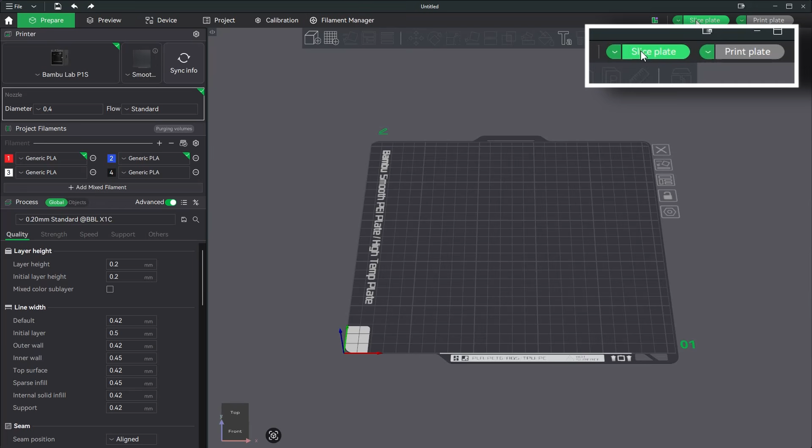Up in the right-hand corner, you have two green buttons: Slice Plate and Print Plate. Slice Plate processes your model into layers. Print Plate slices and immediately sends your job to your printer. We'll be using both of these.

The entire left panel is your control center. Scroll down and you'll see everything stacked top to bottom: Printer at the top, Nozzle settings, Project Filaments, and then Process, which is your quality and print settings. This is where almost all the setup happens.

The large area to the right is your viewport, your virtual build plate. Left click to drag and orbit, right click to drag and pan, scroll wheel to zoom. Just above the viewport, there's a toolbar with model manipulation icons. We'll be using those once I bring in a model.

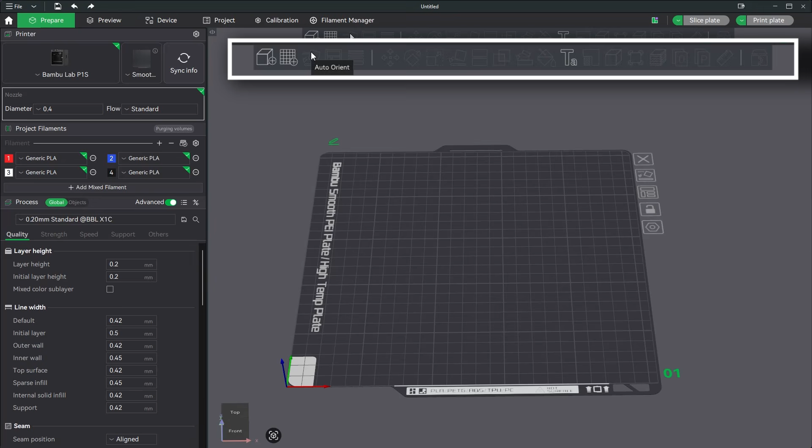Okay, it's time to bring in a model. Easiest way is to drag and drop an STL, OBJ, STEP, or 3MF file straight onto the build plate. I'm using a model I created in the last video - the one and only Gengar. You can also go to File > Import if you prefer. Bambu Studio drops the model centered on the build plate.

Depending on your file, it might come in the wrong scale or sideways. Okay, let's fix that. Since Gengar came in at a small scale, first thing I want to do is click on Scale. I want to leave Uniform Scale checked so that everything scales equally, and then I'm going to set it to 75 millimeters. Rule of thumb, if you're in America, 25 millimeters is usually about an inch, so 75 is 3 inches.

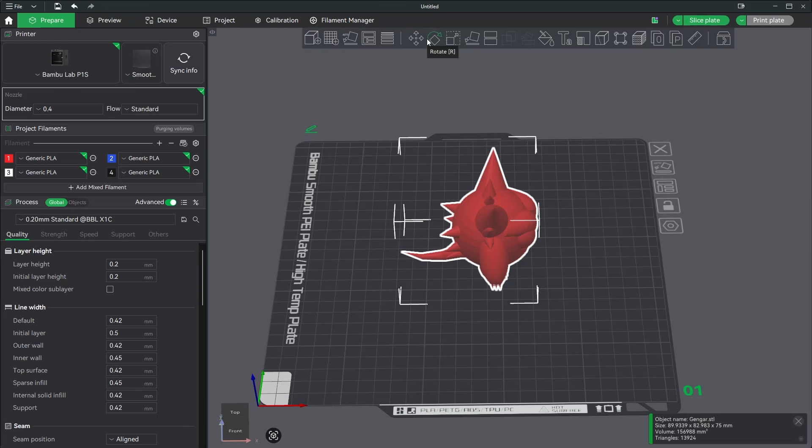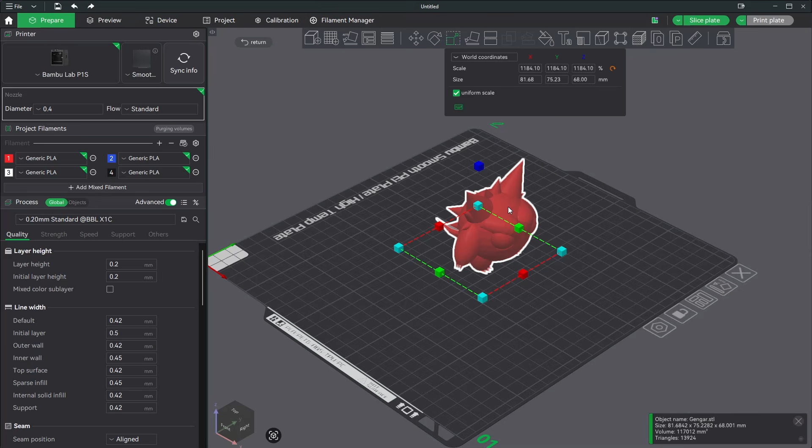Once it's in, click on the model to select it. You'll see this cube-like object around the model, and up in the toolbar, the Move, Scale, Rotate tools light up. Once you click on a tool, you'll get a tool-specific gizmo depending on which one you select. With Rotate, you can rotate. With Move, you can move. And with Scale, you can scale. You can also move just by clicking and dragging the model around.

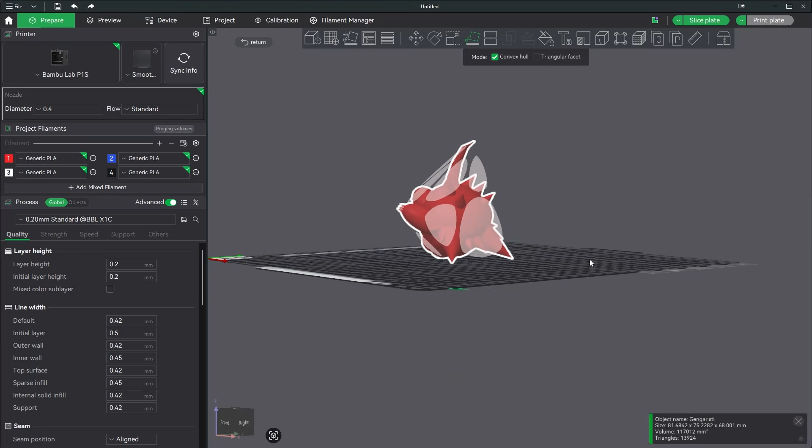There are two tools I use a lot. One is Lay on Face - this gives you options on which face of the model you want to lay on the build plate. If I click here, it'll lay it this way. Granted, this might not be the best way to print, but it's an option. Click it again. The other one is Auto Orient - it'll give you the best orientation to minimize supports and maximize bed contact.

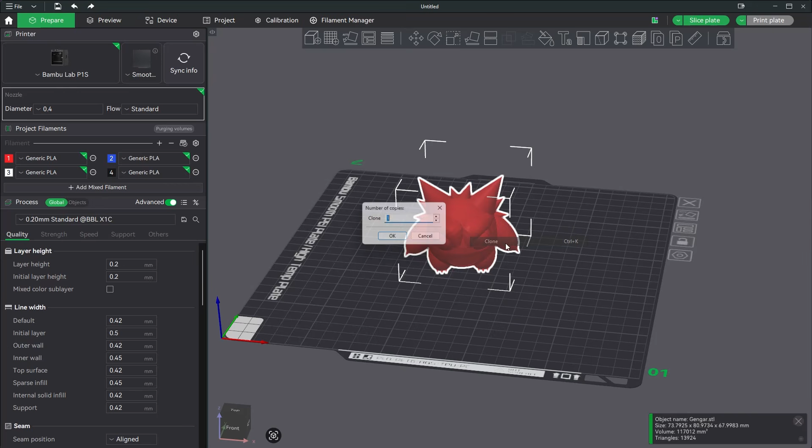Now if you right-click on the model, you get all these options. One is Clone, where you can make copies. The other is Center, where it centers the model. If you play around with these, you'll find whatever you're looking for. You can mirror, split, delete, whatever you want. Remember, you need to play around with the program to learn it, and like I said, your model's safe - you're not going to break it.

Just play around and you'll find the best settings on your own. I believe in you. Okay, let's go to print settings.

In 2.7, everything lives in the left panel. Scrolling to the top, let me walk you through it section by section. At the very top, you have the printer section. You'll see a thumbnail of your printer, and next to it is the plate type. There's also a sync button that pulls the current state of the connected printer.

Just below is the nozzle section. Diameter set to 0.4 by default, flow set to standard. Make sure the diameter matches the nozzle physically installed in your printer. Most Bambu printers ship with a 0.4 millimeter nozzle.

Below the nozzle is the filament types. Number slots, slot 1, 2, and so on, each with a color swatch and filament name. For single color print, you only need one slot. Click the drop down to change the profile. I got generic PLA, but you could also use Bambu ABS, ASA, and they correspond to whatever material you actually have. The reason I have 4 is because I have an AMS.

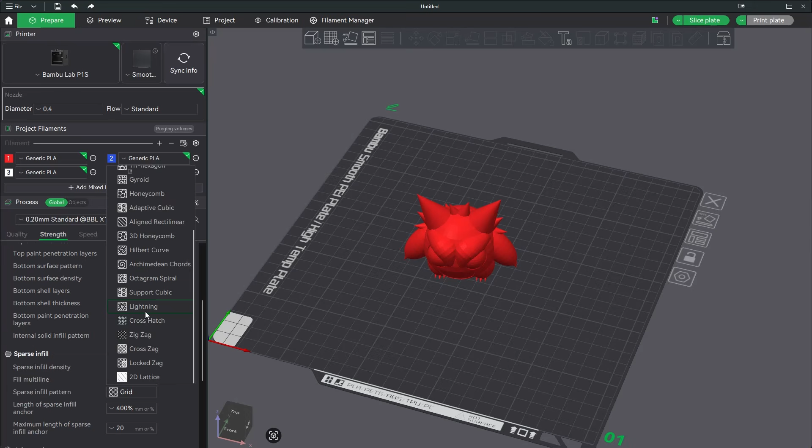The pattern drop down controls the shape of the internal structure of the model. Here you can pick from lightning, which is one of my favorites. This just gives you a hollow piece, but at the top you have these lightning supports that support the top layers of the model.

You can go with the community favorite gyroid. It's really strong in all directions, thus why it's very popular with the community. If you don't have any preference, grid is a perfect choice.

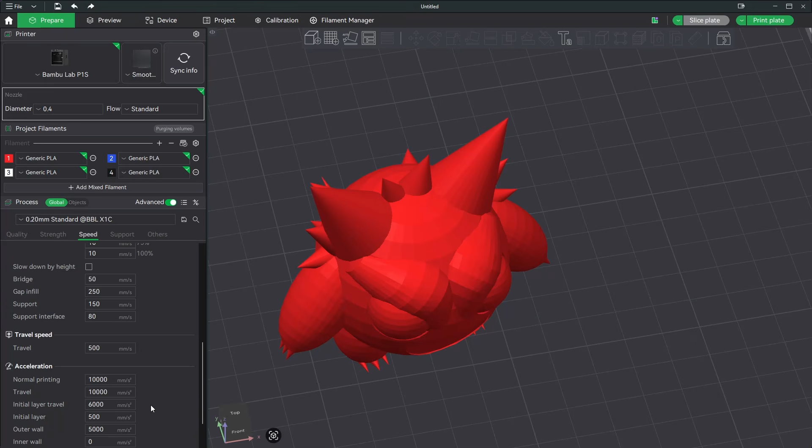Okay, let's move on. As far as speed, like I said, just like quality, I usually don't touch it unless there's a problem. These settings are fine.

Let's go to support. If your model has overhang sections like this model does, with parts hanging out in midair at a steep angle, you'll need to enable supports. You do it by clicking here. The type drop down lets you choose normal or tree supports. Tree supports use less material and are easier to remove. Threshold angle controls how steep something needs to be before the support is generated — 30 degrees is the safe default. I wouldn't touch it unless I had an issue.

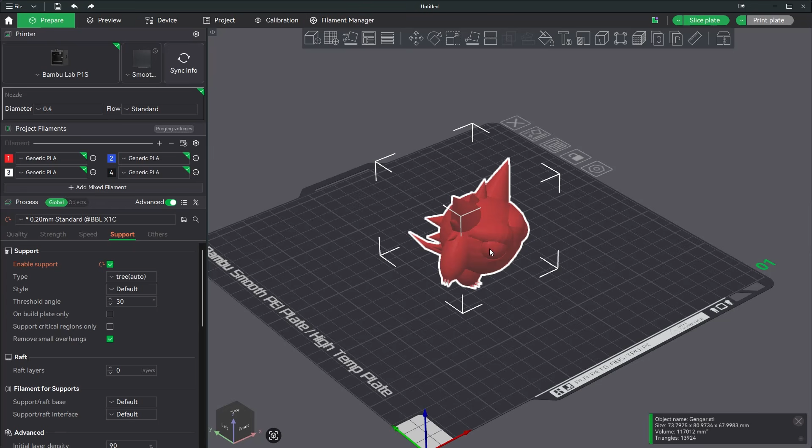All right, so settings are in. Let's position the model. Again, I'm just gonna click here and click on auto, and then I usually like to put it in the center, so I click on center. It's time to slice, so I click on the slice plate button.

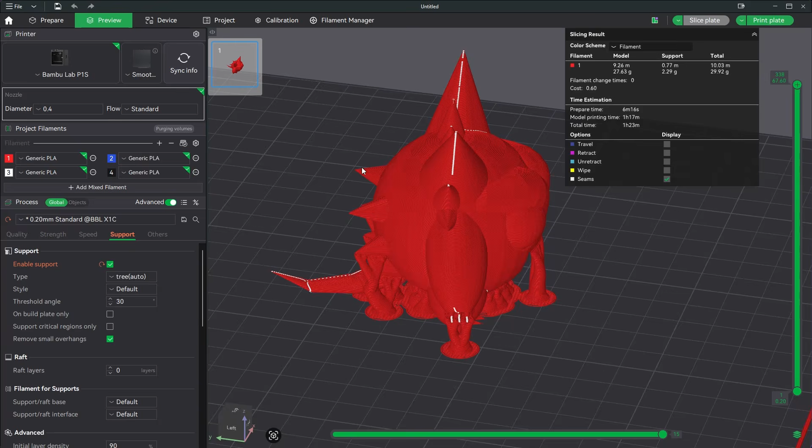It'll slice your model on the plate. As you can see here, you have the tree supports and they're supporting anything that's gonna be in midair so that your print doesn't fail. These spikes over here are not being supported because the angle means it's going to print from here and keep going up, supporting itself — it does not need any supports. So the slicer automatically puts in the most efficient supports so you don't waste any filament.

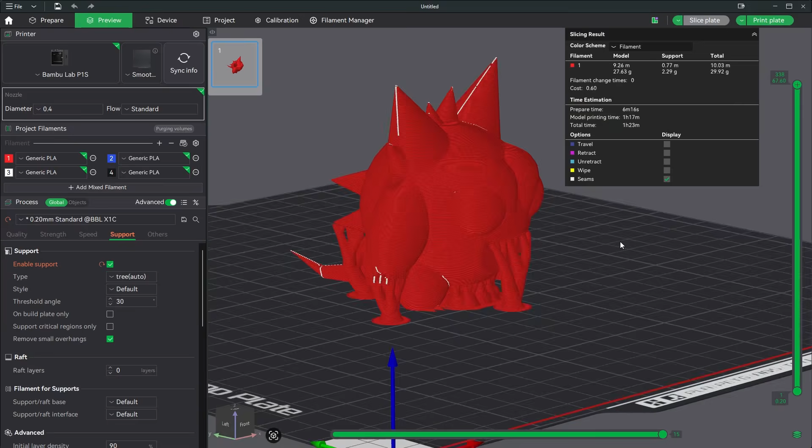You also see that we're now in the preview tab. The preview tab tells you how much filament you're going to be using for the model itself and for the supports, and gives you a total in meters — basically the length of the filament you'll be using. It'll also tell you the prepare time, model printing time, and total time: 1 hour and 23 minutes.

If I click down here, there's other layer height options.

If you're setting up different layers, temperature, and then line type, this gives you outer walls, it'll give you internal solid infill, outer wall, etc. It just gives you a color-coded description of what each part inside the model is going to be.

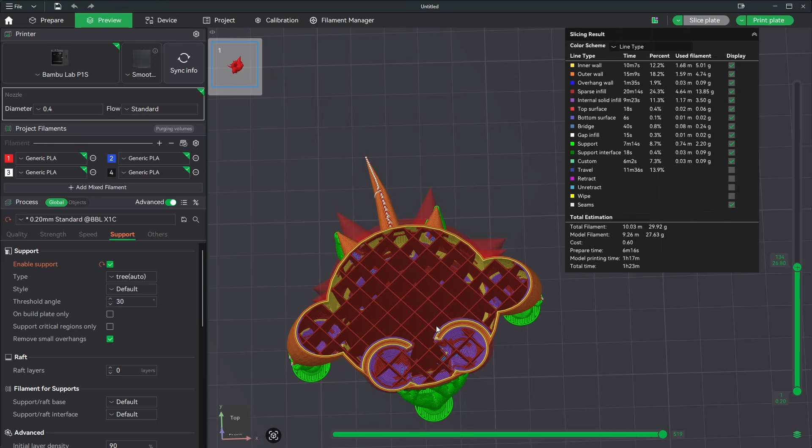So let's go back to filament. Once you're happy with your preview, and you're happy with all the settings, click print plate.

And then this dialog box will appear. This is your sent print job. It'll basically give you a summary of everything that's going to happen. Are you sure this is the printer that you want? Are you sure that this is the plate that you want? Are you sure this is the filament that you want?

And do you want time lapse? What time lapse does, every single layer, it takes a picture and then you'll get a video at the end. You could use it to put it on YouTube or maybe to diagnose what happened to the printer if it fails. So let's click send.

And then you'll see this here, sending print job through the cloud. It'll send it to Bambu Lab to their servers, and then it'll download it into your printer.

And then from here, it automatically toggles over to the device and shows you the temperature of the nozzle, temperature of the build plate, is the fan on, are the lamps on, and it tells you all the filaments in the AMS. Right now it's downloading the model into the printer, and in just a few seconds you'll see it start printing.

And it'll give you an ETA on when it's going to finish. As we said, it was an hour and 23 minutes. Right now it's 6:51 my time, and now it's saying it's gonna finish at 8:24, which is give or take about an hour and 23 minutes. It'll give you an estimate. Don't overly rely on this. It'll be close to it, but it's not gonna be perfect.

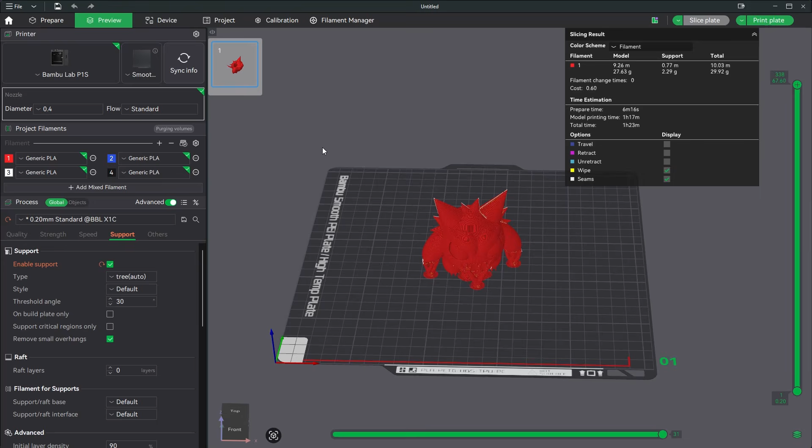Once you print and you're happy with all the settings, and you think you're going to print this again, I recommend you click on File, Save Project, and you can put it anywhere in your computer. I also recommend you save it as 3MF files. The 3MF format keeps your model and all your settings in one file, way more useful than just exporting G-code.

Tip number 2, use your process presets as your starting point. The point 2 standard is really well tuned for Bambu printers. Start there and only change what you specifically need.

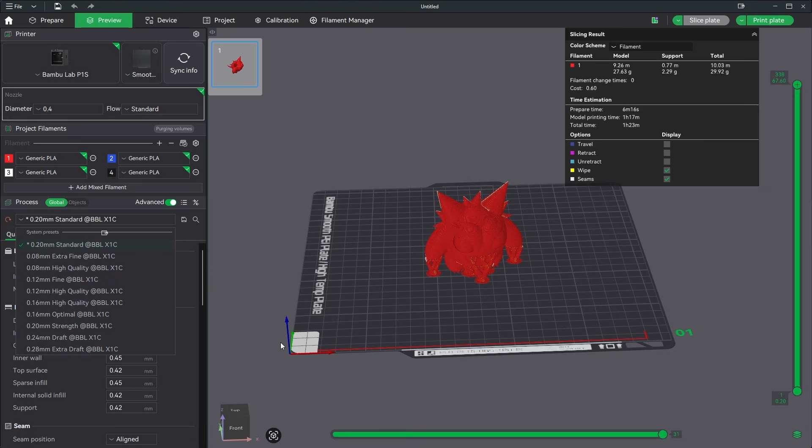That's what the prepare time is for. It'll go throughout the plate and try to create a map internally of where everything is. On the older printers like Creality, you had to do this manually. Thank God for Bambu Lab implementing this.

And finally, slice often, it's fast: change the setting, hit slice plate, check the preview, repeat. Don't spend 20 minutes tweaking without checking the result. And that's the full slicing workflow in Bambu Studio 2.7. Import, settings, slice, send. Looks like a lot at first, but after 2 or 3 times, it becomes completely automatic.